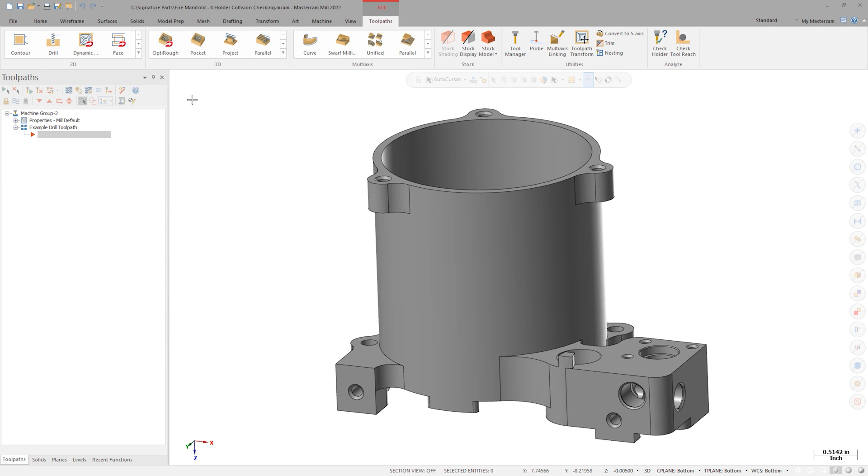Let us make a 2D drill toolpath on the fire manifold to spot drill these holes. We'll select the holes that have the same vector by Ctrl-Shift clicking the inner solid faces. There are 3 136 thousandths holes and 3 89 thousandths holes. We'll leave the sort order as is and click OK.

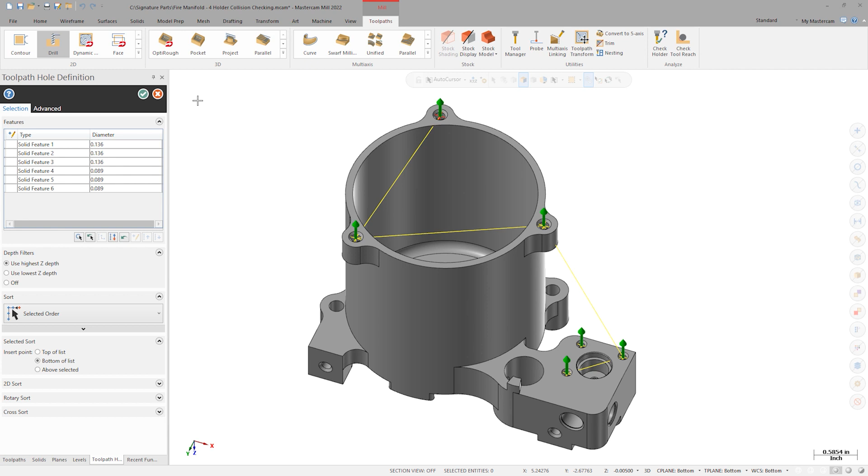Select the entire part as avoidance geometry by triple-clicking the solid body. Fixtures and clamps can be selected here as well. Select Tool 3, the 1/4 inch spot drill. Go down to the linking parameters page. The new automatic linking checkbox is at the top.

Automatic linking will create safe linking moves between holes, calculated from the selected avoidance geometry. Clicking this will lock the clearance height to absolute and the retract height to incremental. To set the drill depth of each hole, click the calculator button under depth.

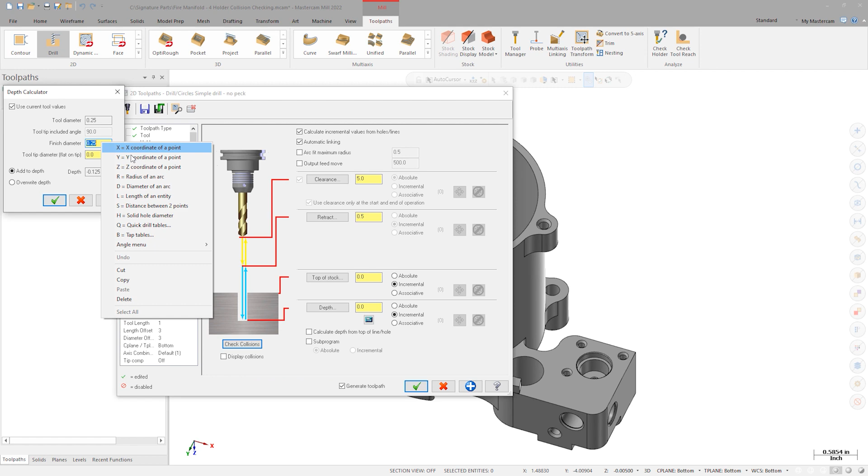Under finish diameter, right-click and select diameter of an arc. Select the top solid edge of the hole. Leave the selection on add to depth and click OK. Click calculate depth from top of line/hole.

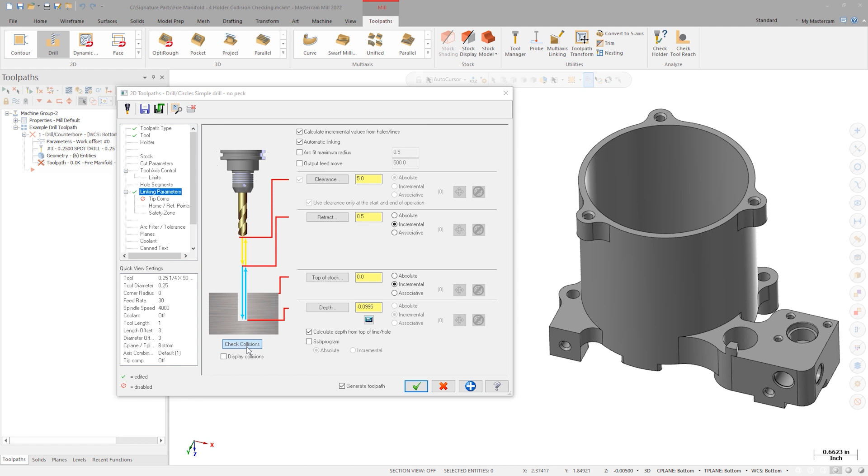Over on the left-hand side is a new holder collision checking tool. We can toggle on the collision display outside of the dialog box. Click Check Collision to enter the new panel. Right now, we get a list of all the holes that we've selected.

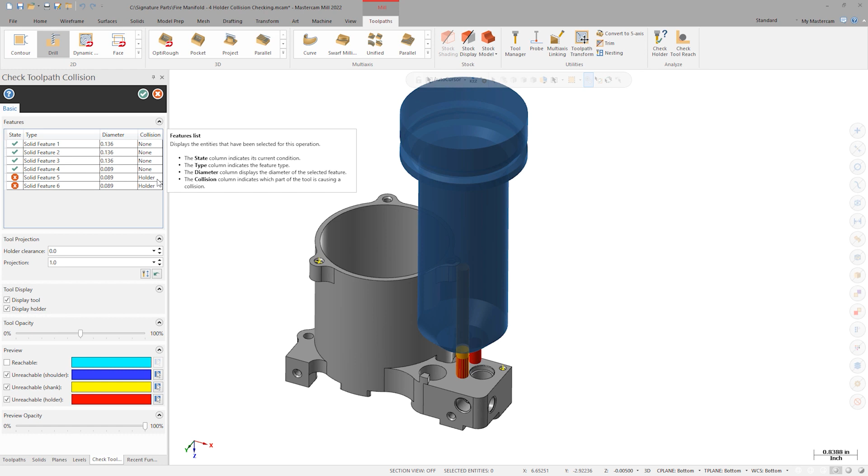The left-hand column shows collision state. The rightmost column shows if the holder, shank, or shoulder is in collision. In this case, the holes in red show that those holes are unreachable since the holder is in collision. We can manually click and drag the holder until it clears.

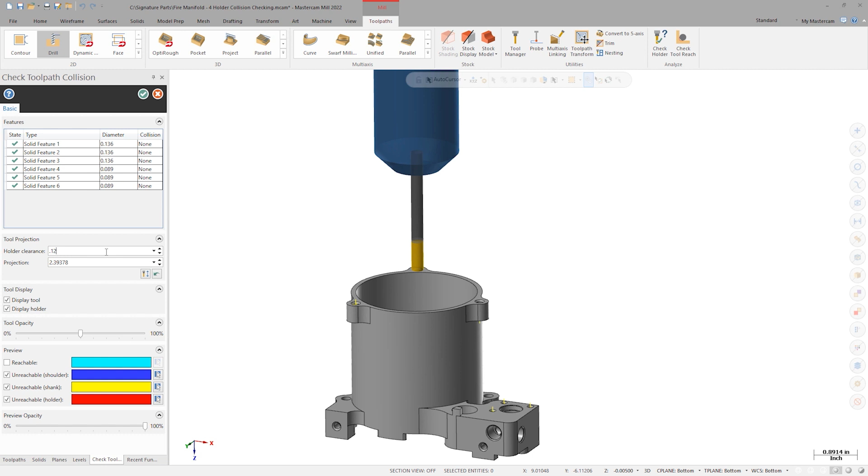There's also an Optimize Projection button that will automatically set tool projection based on the holder clearance input. You can change tool opacity for visibility with this slider.

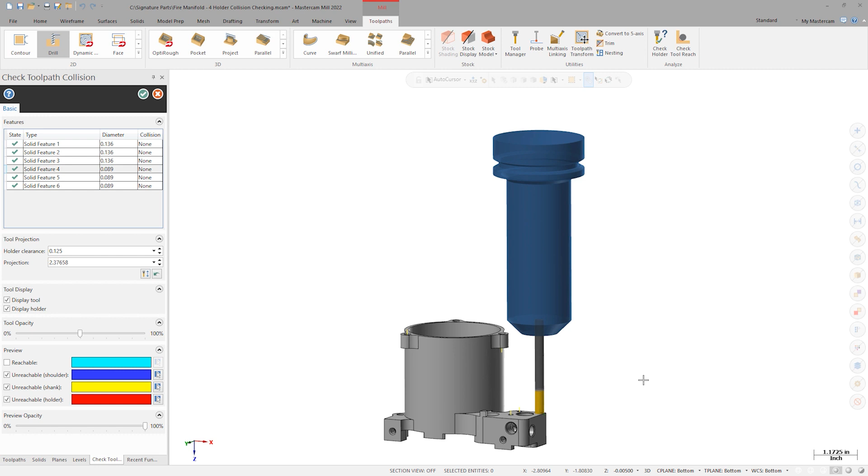Left-clicking once on the tool allows the tool to follow the pointer and snap to different hole locations. Left-clicking again will release and place the tool. Click OK to exit the collision checking tool. Now, click OK to exit and generate the toolpath.